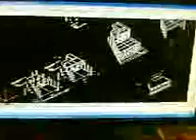Before explaining further, I shall show you certain drawings that will tell you about the members. Here is a drawing on AutoCAD showing a building in three dimensions. This is the building in three dimensions on AutoCAD.

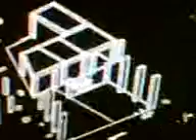You can see this is in hidden form. You can see it as it is, and I'll show you this. This is the construction of this drawing in phases, and you can see these vertical members are called columns. These members are columns; in technical language we call them RCC columns, or simply columns. And here, let me make a build-up of this.

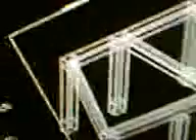Let us see, I have blown it up. You can see this now. If you see this blown-up zoom, here are horizontal members. These horizontal members are called beams.

You can see this hand sign. These are all beams, where the hand sign is moving, palm sign, and these are all beams. These are all columns. This is a column, this is a column, this is a column, and this is a three-dimensional structure.

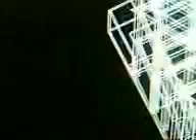And if you go to this one, this is a wired structure, meaning without hidden form - this is just showing the wire frames, all in three-dimensional form. This frame shall be hidden, but this is the construction procedure showing how the building is constructed. You can see all this entry, the various floors and all the line work, wire framework. You can see the other floors also, same structure, and this is the staircase here.

All this shall be hidden when I apply my hide command. Here I am applying the command. This will - and here it is hidden. See, it will hide it, and after some processing it's hidden, and this is the hidden building now. You can see it this way also.

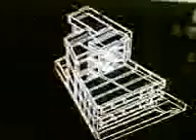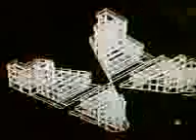You see, this is hidden, and I'll show you various poses of this now. See, these are all directional poses of this building, the structural work, all four directional poses, which is very, very important from understanding viewpoints. You can see this. Now I'll hide this. After some procedures, it will hide.

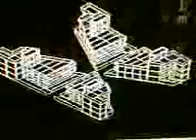You can see this now. It is hidden, completely hidden. And hidden means wires are hidden, wire frames are hidden, but the view is visible. This is one direction. This is the other direction. This is this direction, and this is the other direction. And this is what engineering designs and engineering drawings are. This is after analysis of the structures. This is very, very important.

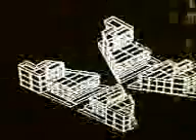Then the most significant design activity is the design of the frames of the structures. A frame, as I explained to you before in these drawings, comprises various members of the building in different areas depending on the spans and the size of the building. Generally, the vertical members are called columns, while the horizontal members are called beams, as I displayed to you on the drawings. The columns connect from story to story, while the beams connect one column to another column. Every building comprises many main and cross frames.

These frames receive the various types of loads as indicated before from the slabs, through the beams and then to columns from top to bottom, the columns to the foundations and then to the soil. The job of the designer is to contemplate the best positioning of the frames to meet the architectural requirement of the building, simultaneously allowing the openings of various modern services of all disciplines, namely electrical, plumbing, mechanical, air conditioning, firefighting, internal and external drainage, rainwater discharge, thermal insulation, telecommunications, and so on.